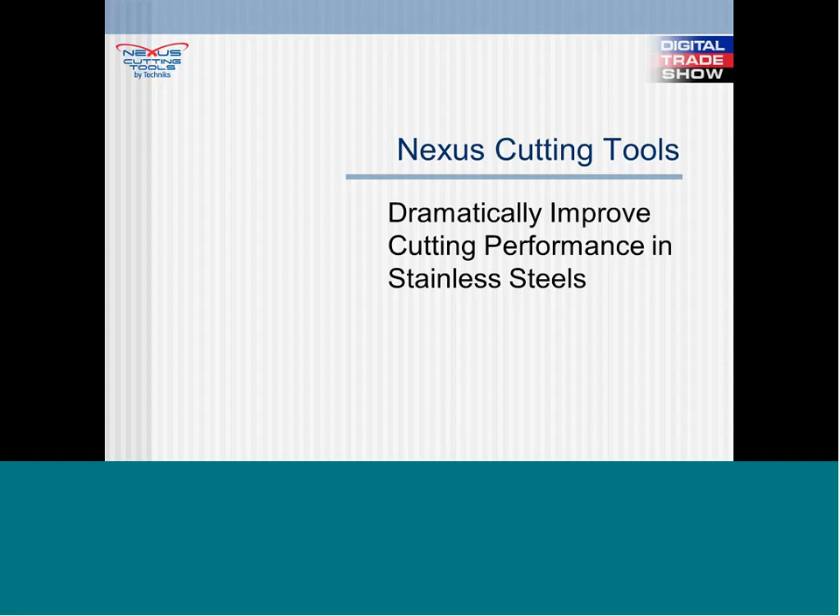This morning, I want to introduce you to Nexus, our insert manufacturing partner, Lamina, and discuss how these products can help you be more profitable and productive in machining stainless steels.

Before we go into any detail, I'd like to give you one small example. Whenever we bring in a new product line, we want to test it in the field and see what sort of results we get. In this case, we called a well-respected job shop customer in Indianapolis who is also a neighbor of ours, and he said, 'Sure, I've got just the part for you guys.' Well, the part was a little challenging. It's stainless steel, there's heavy interruption in the cut, and this particular customer is requiring one entire negative insert per part. In other words, this is what salespeople commonly refer to as the square egg opportunity.

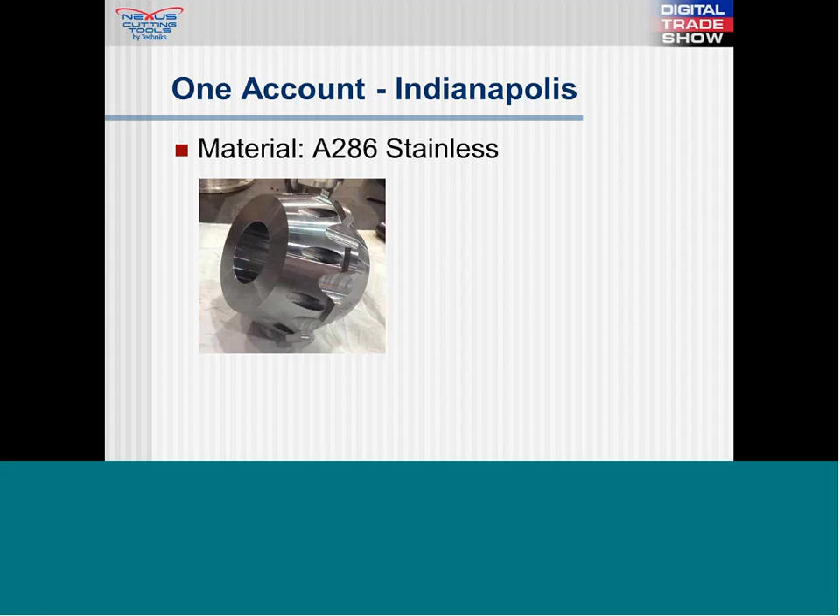So we tested our new Lamina insert from Nexus. In this case, it was a CNMG 432 with the LT1000 coating. And the results—wow. Based on our customer's job of 300 pieces, he went from using 300 inserts to 75 inserts from Nexus and Lamina. This morning, I'd like to spend a little time explaining how this happens and how you can get similar results.

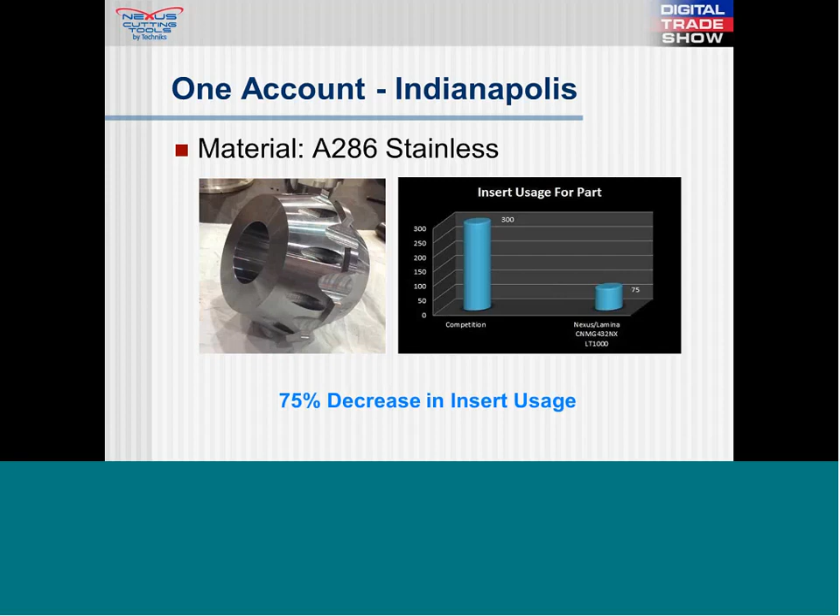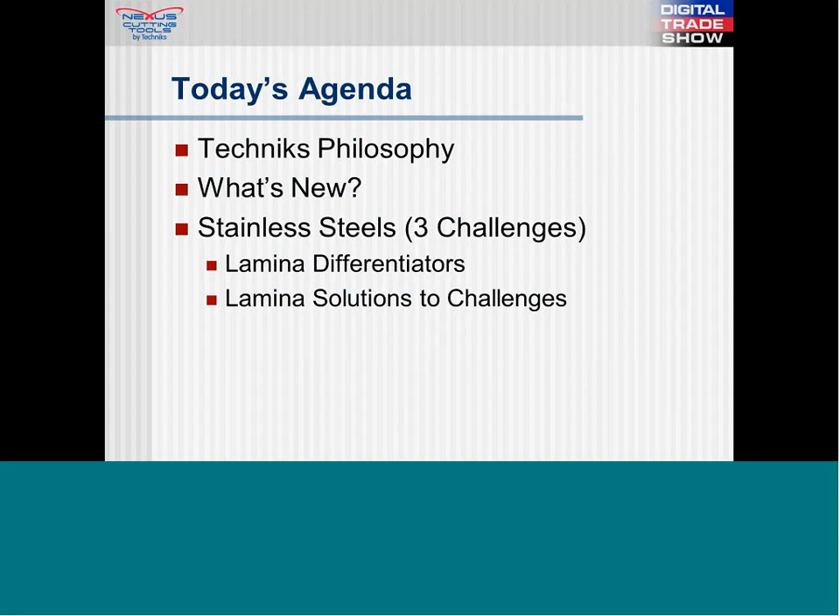The agenda we're going to follow this morning is, first of all, to talk for a moment about Techniks, our company, and our philosophy. I'll be very brief about that, but it is important. Then the eternal question of what's new, the three main challenges of machining stainless steels, and how Lamina addresses them. Finally, and most importantly, how we can work together to test these solutions in your applications.

Even though we can't see each other right now, this time is really about you, the customers, and the only way we can judge our success is by customer results. So a little bit about Techniks.

For over 15 years, we've helped customers with innovative approaches to the CNC world, focusing mostly on the tool holder connection. We've lived by one simple principle: every .0001" of runout costs a customer 10% in tool life. Applying this principle to end mill holders, collet chucks, etc., has set us apart from our competitors and helped earn us a reputation for quality. The way to address run out with a tool holder is by addressing the rigidity and accuracy of the holder. And that's why one of our most successful marketing slogans is and has been, 'Success depends on every component.'

But we're also an innovative company. Tighter bore tolerances in end mill holders, ultra-precision collets, power coat nuts for collet chucks are not exciting things to talk about. They're simple, they're innovative, and they're very effective though. And truthfully, I wish I had a nickel for every time a customer at a trade show has looked at one of our new products and said, 'Why didn't I think of that?' But we're also more than tool holders.

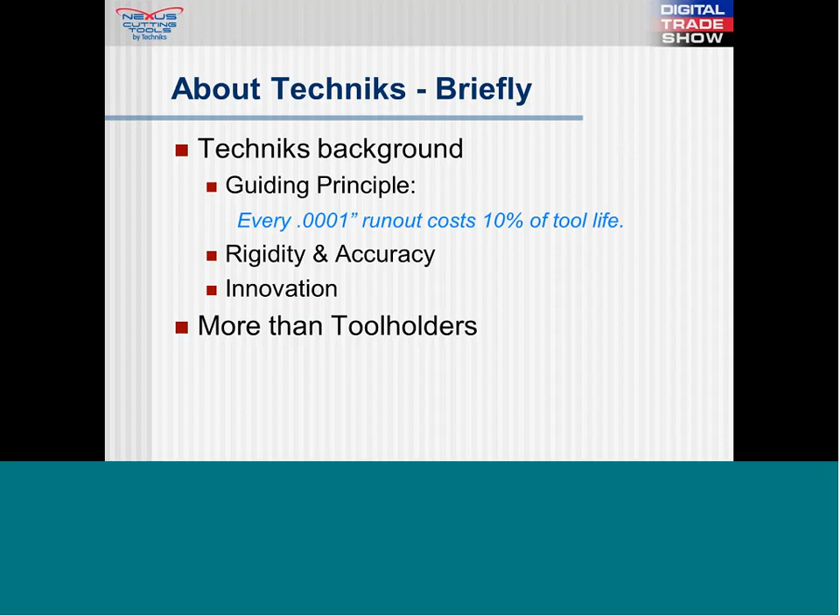Several years ago, we decided to get into the magnetic work holding business because we saw some opportunities to help customers. Over time, that has proven to be a great decision, because instead of helping customers with incremental 1% and 2% improvements in productivity, magnetic work holding has helped them gain 50% time savings. 200% and 300% productivity increases are not uncommon. And always we're looking for new ways to help customers.

Everywhere we go—trade shows, manufacturing plants, open houses—we always get the same question: what's new? Well, today, American manufacturers seem more determined than ever to find new ways to gain competitive advantage. Reshoring American jobs is now as common a conversation as offshoring was just a few years ago. Obviously, this is a very good thing. We're a company that thinks differently, and we think we can bring a helpful and new approach to the way that customers use carbide inserts.

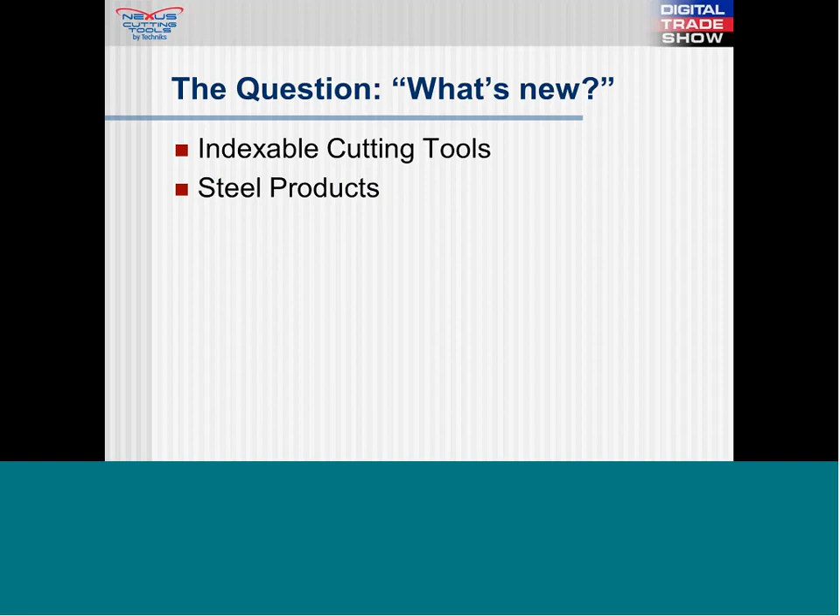Additionally, we're leveraging our expertise in tool holders to create high-performance face mills, indexable end mills, turning tools, boring tools, and indexable drills. In fact, we have several new patents designed to improve rigidity and accuracy in holding tools. The first of these is our shrink mill system. We're the first company to apply heat shrink technology to a face mill. This shrink mill system reduces runout by as much as 30%.

The second new patent is our power lock system. This transforms a standard Techniks collet chuck into a high-performance milling chuck by simply inserting a square shank adapter into the collet chuck. The female adapter engages with the male end of our end mill holders, translating to virtually unlimited holding power, with the accuracy of a Techniks collet chuck at half the price.

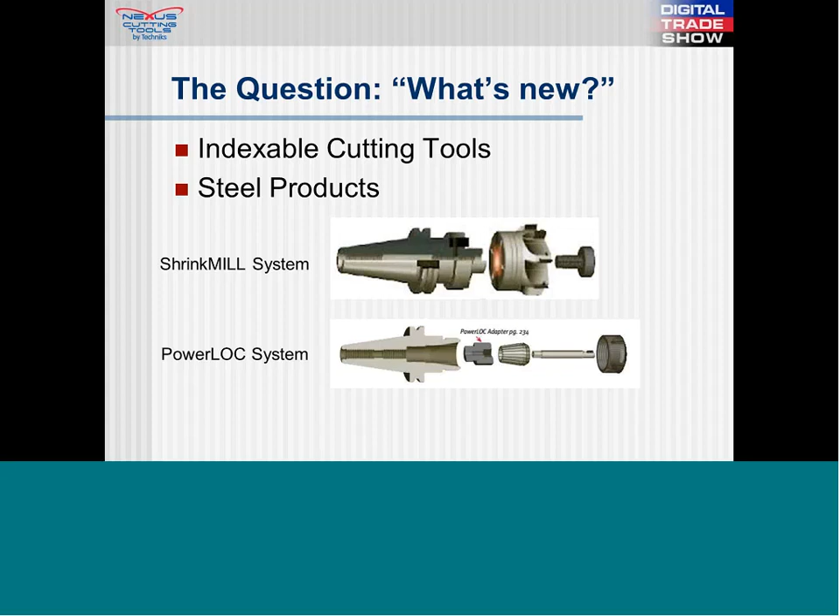So a reasonable question we've gotten from customers is why Techniks and cutting tools? It's important to know a few facts about the way customers use inserts. Some of these facts may be surprising, but my guess is a lot of this will resonate as true for you and your customers.

A few industry facts: half the time, inserts are selected incorrectly. Nearly half the time, inserts are applied incorrectly. And again, nearly half the time, inserts are discarded before they're fully used. It didn't take us long to look at this information and understand there's a tremendous opportunity for someone who can help customers make sense of this and simplify their work.

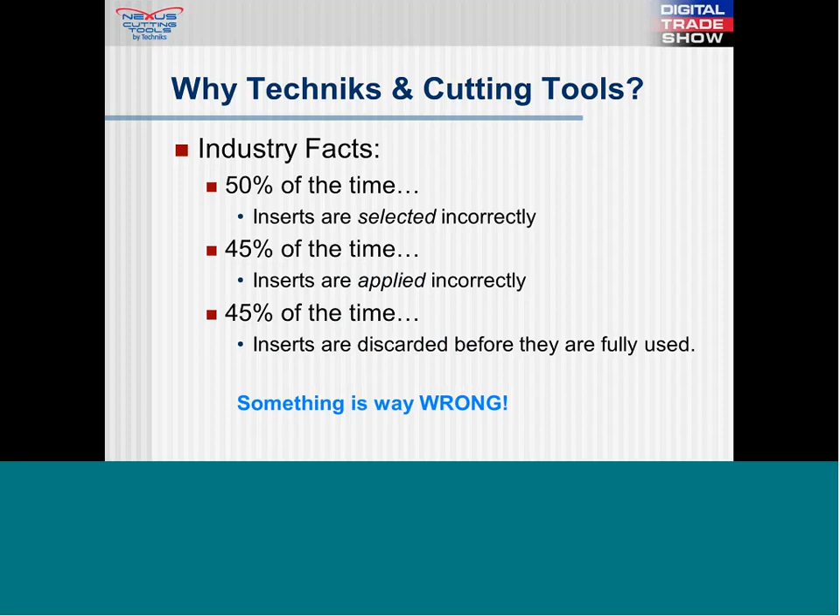So why Lamina? Why did we select them as a partner? We did several years of research, interviewing, and due diligence in our search for a manufacturing partner to make our carbide inserts. The nice way to say it is let's just agree that we kissed a lot of frogs. But eventually we arrived at Lamina Technologies from Switzerland.

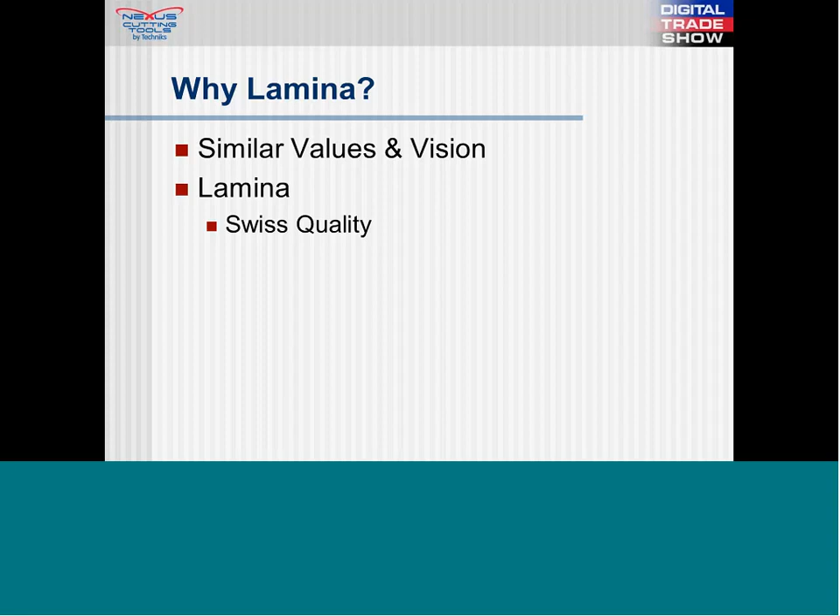First of all, they met our criteria for quality. Swiss quality is a phrase that still carries a lot of credibility, and Lamina lives up to the billing. One small example is that within their insert batches, their tolerances were held to plus or minus 5 microns.

Second, we're extremely compatible in philosophies. They challenge the status quo. They want to offer simplicity, particularly to the small and mid-sized shops who don't get the attention of the large carbide manufacturers, instead of the typical new grade offerings that customers are conditioned to expect a couple times a year from the major carbide manufacturers. Most importantly, they use common sense in developing products and serving their customers. Like us, this means simplicity, predictability, and responsiveness.

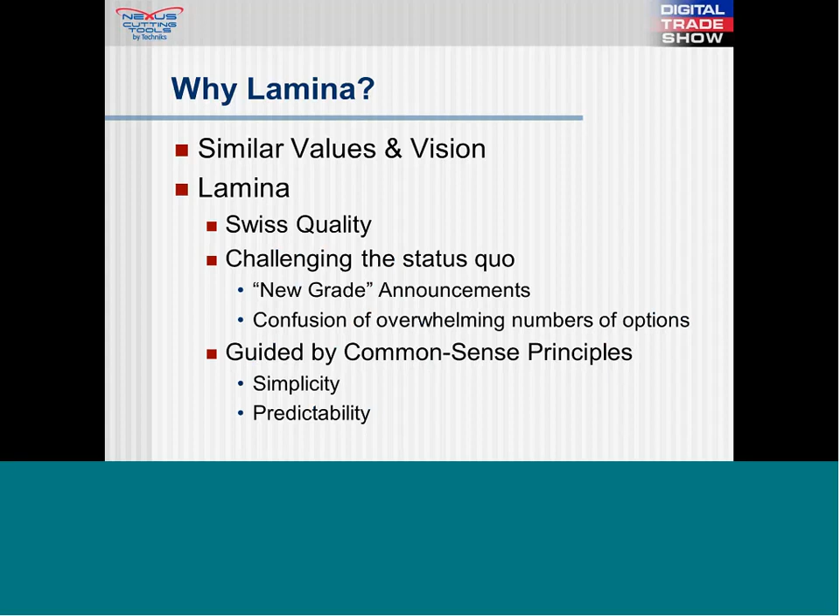So how does this help with stainless steels? That's what we're here to talk about today. I'd like to review 5 ways in which Nexus and Lamina work together to address the challenges of stainless steels.

As we've discussed, the importance of using the right tool holder for the job goes a long way to start with. However, on the Lamina side, they start with a sub-micron carbide powder with no cobalt enrichment. This helps resist the compressive forces typical of cobalt-enriched inserts, and we'll get to this later and how this affects application.

The third point is proprietary edge preparation. Lamina's unique edge preparation is a complete departure from the traditional brush honing technique. Instead, Lamina uses a micro sandblasting technique that allows tolerances of plus or minus 5 microns. This precise honing allows for extremely sharp geometries, even with Lamina's substantially thicker PVD coatings.

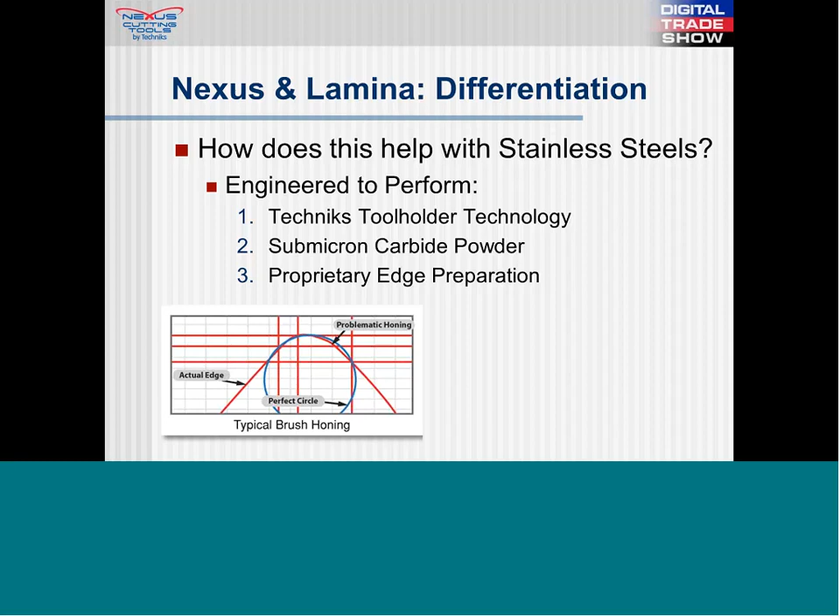Note in these graphics, the competitor shown now, the blue circle represents a perfect circle, and the red arc represents the actual edge of the insert. The closer the actual edge follows the perfect circle, the more precise and consistent the edge geometry. On the right is Lamina's edge preparation, and as you can see, the differences are dramatic, and this will translate to dramatic performance also in machining.

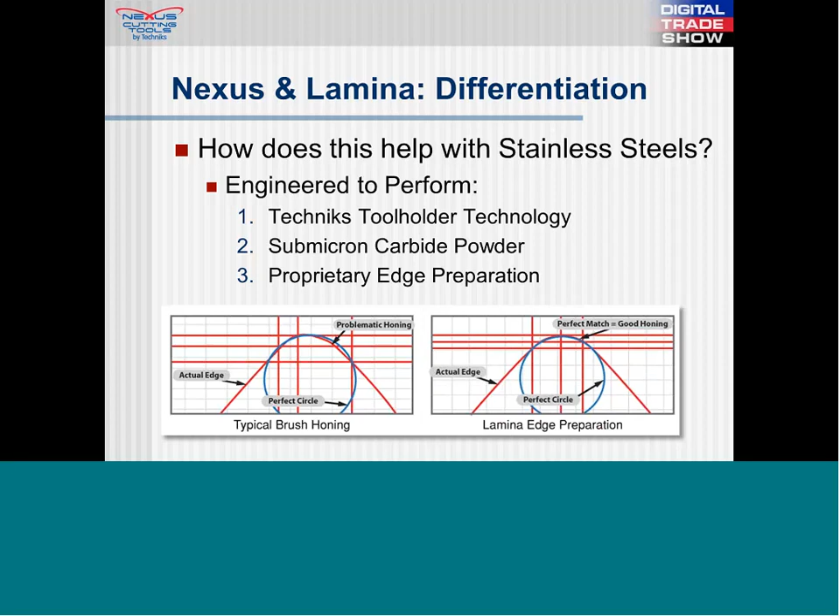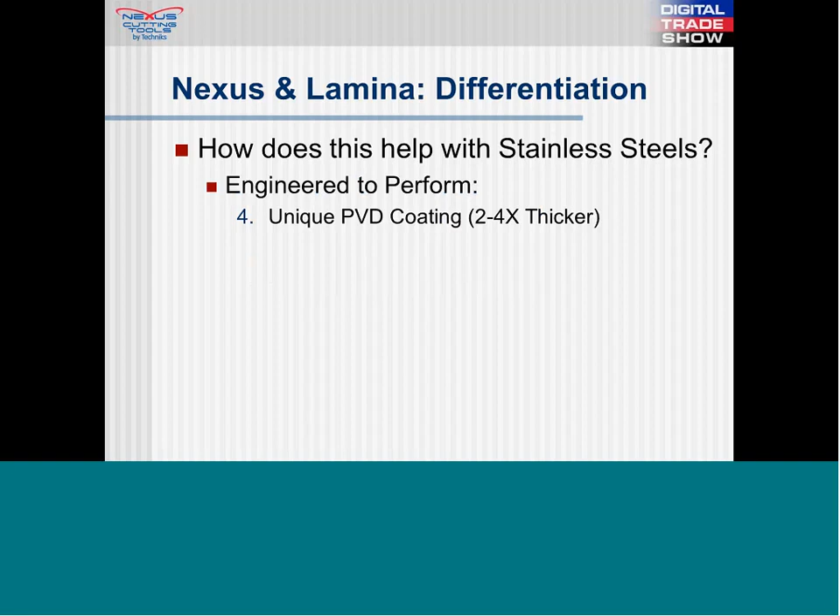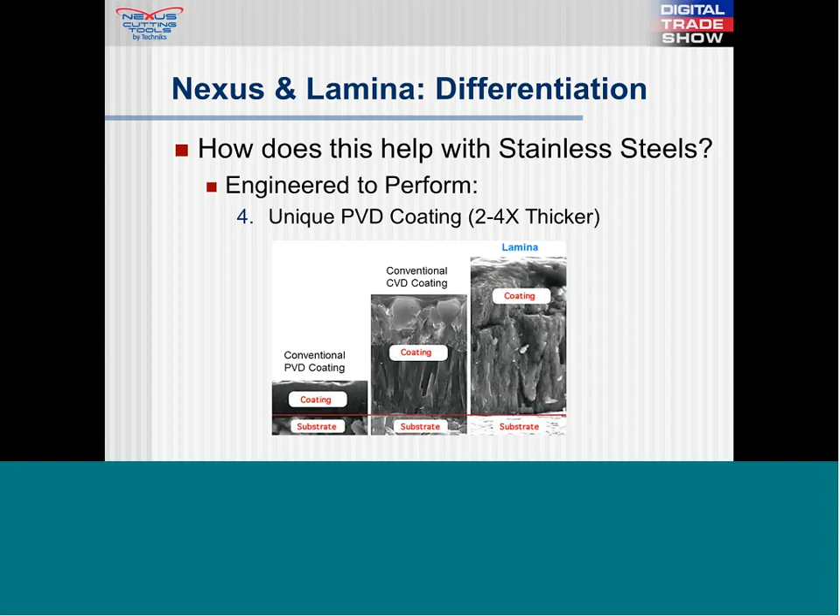The fourth item we're going to discuss is Lamina's unique PVD coating. Lamina's proprietary PVD coating provides both heat resistance and toughness. Lamina's scientists have developed a proprietary PVD coating technology, the newest version called Magia. This is 2 to 4 times thicker than their nearest competitor. These coatings dramatically increase the insert's overall life and performance, accompanied by sharper geometries from the precise honing technique. Customers experience far less downtime and gain productivity that many thought unachievable.

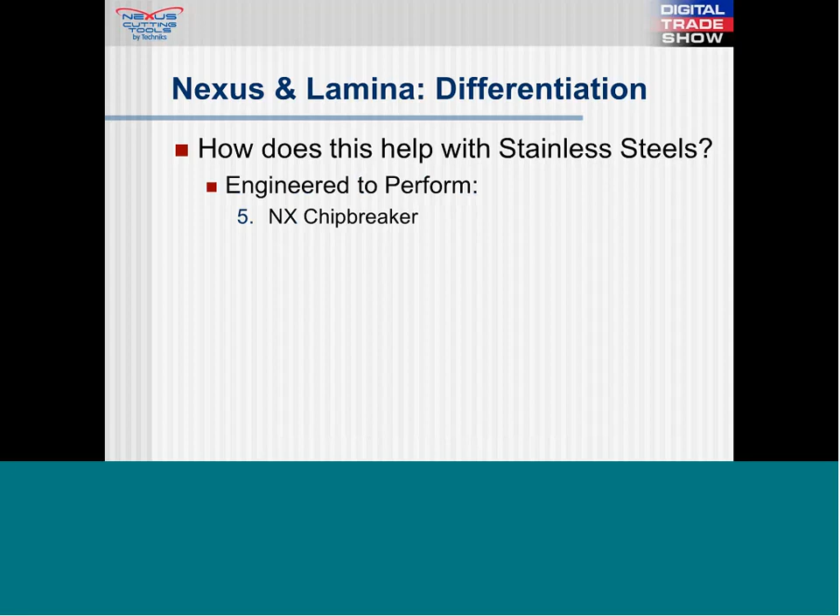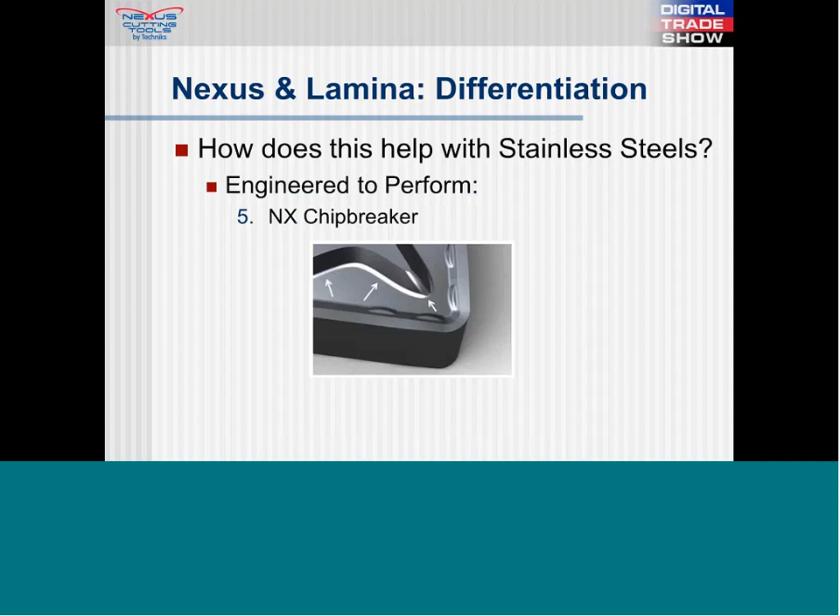The last item engineered into the product to help with stainless steels is Lamina's NX chip breaker. This is perfect for the ductile and gummy nature of stainless steels. This innovation provides a fully positive rake angle, precisely positioned deflectors, and a post-coating surface treatment to reduce friction and enhance chip evacuation in abrasive materials like stainless steel.

So let's talk a little about stainless steel categories. As this audience understands, there are 3 basic categories of stainless steel. The first is martensitic and ferritic, for example 400 series and 17-4 PH. A brief comment on this category: these materials are the least challenging of the groups. They have very similar machining characteristics to alloyed steels. Lamina solutions offer customers the advantage of working in these materials, but that's not where our focus is going to be today.

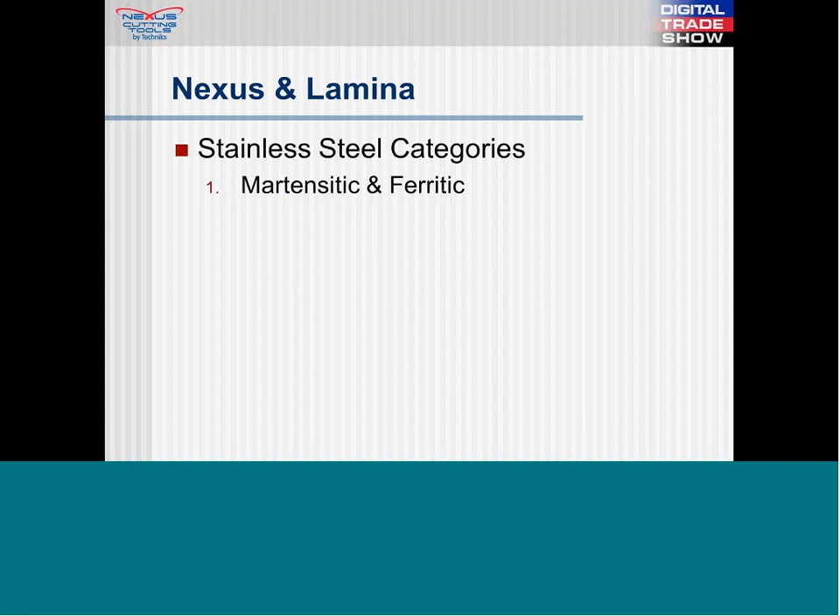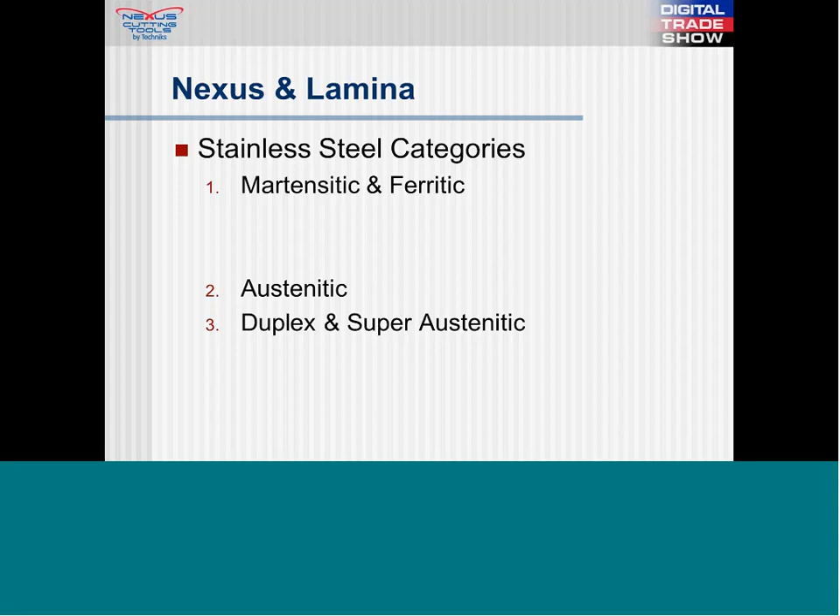We're going to focus on the second 2 categories, which are austenitic, and then duplex and super austenitic. Austenitic would be, for example, 300 series stainless steel. These last 2 groups are the most difficult to machine, and it's where we want to spend our time today. They behave very similarly to high-temp alloys because of their heat resistance and cutting forces. Let's take a look at the challenges. There are really 3 challenges, and how Lamina addresses them to help you and your customers.

Number one: stainless steels have a tendency to work harden during machining. This is again due to their gummy or sticky nature, the words that typically come up.

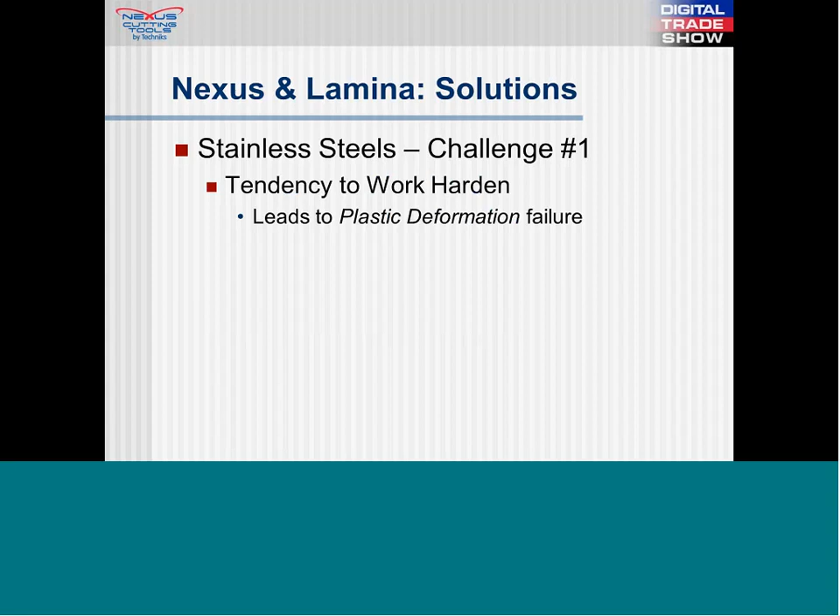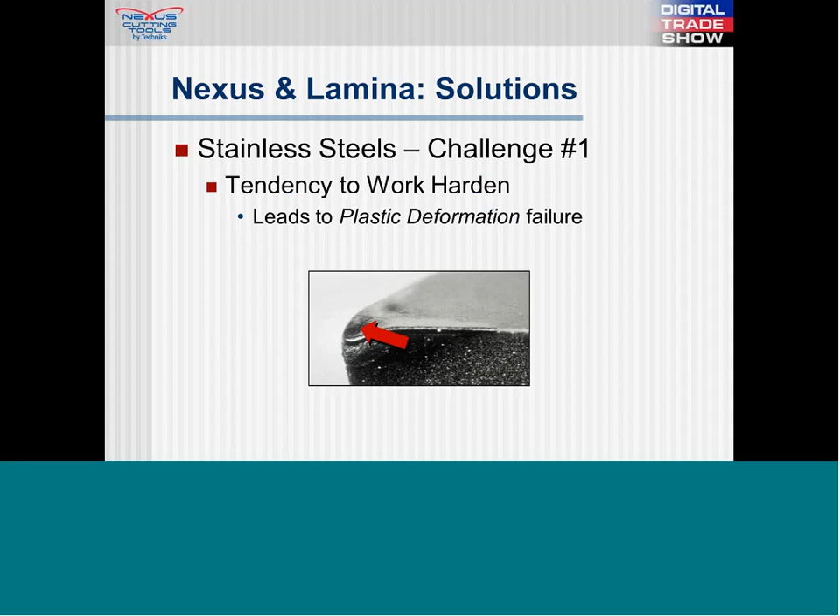Work hardening keeps the heat in the workpiece and in the cutting tool instead of being evacuated with the chips. Typical inserts will fail due to plastic deformation in these circumstances, and I've shown a photograph of it here that may look familiar to you if you've had to work in stainless with most inserts.

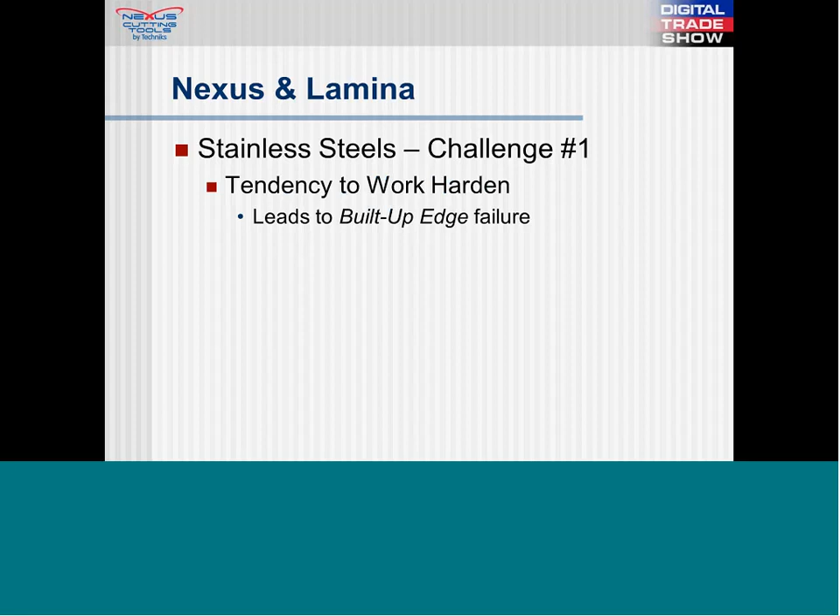Now we're still talking about work hardening. What some customers will do is simply slow down on their feeds and speeds to help address the problem. However, that creates a different problem known as built-up edge failure. In other words, whether you slow down or you don't, you usually have two choices with stainless steels that lead to premature failure modes, and neither of these choices is a good option.

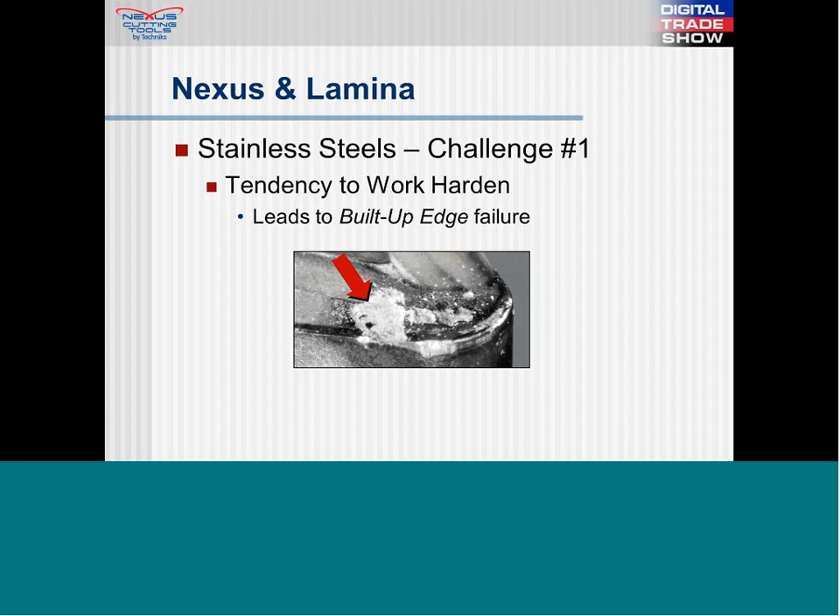So how does Lamina address work hardening? Well, first, the NX chip breaker, which we talked about a moment ago. It's fully positive rake angle - sorry to be repetitive, but this is very important - and the honing technology easily cuts the gummy material. That's what it was made to do.

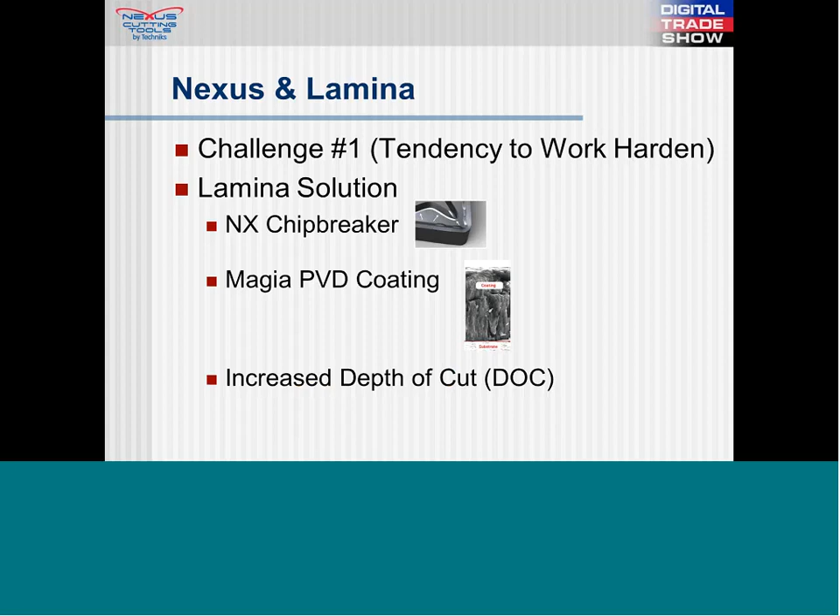The second thing is that coating. The PVD coating greatly reduces friction. Combined with the NX chip breaker, these two features produce far less heat and far better chips, extending your tool life. Now, incidentally, Lamina inserts like to take heavy depths of cut. An additional benefit is that your productivity is going to increase even further thanks to that.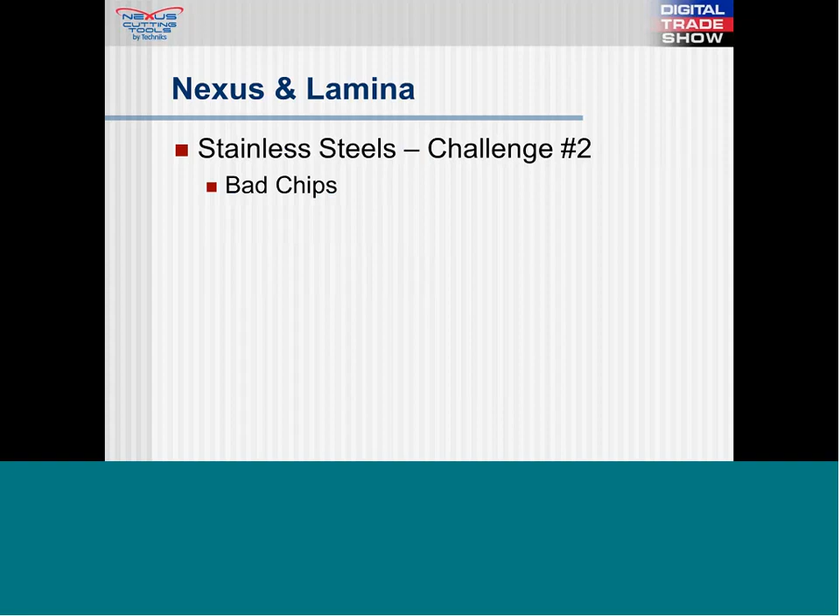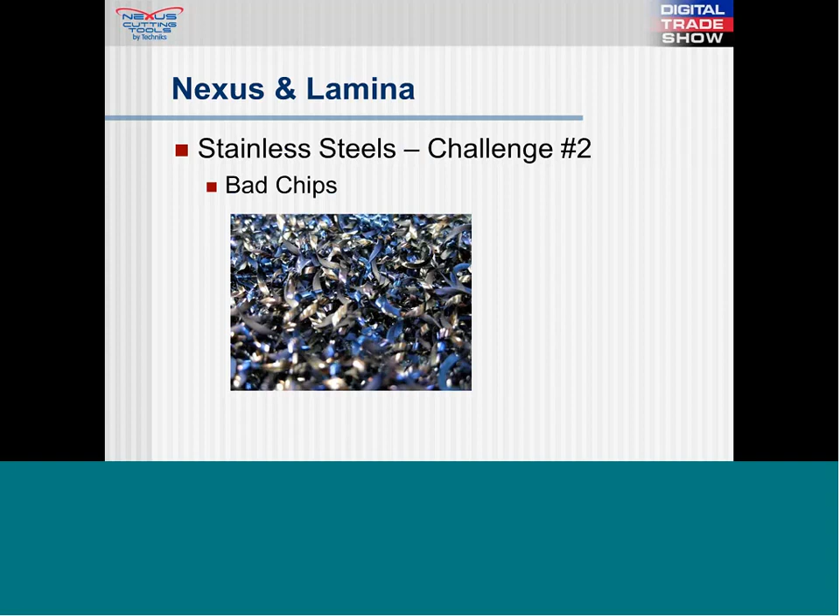Challenge 2, bad chips. This is due to the ductile, gummy, sticky nature of stainless steels. In most inserts, stainless steels produce undesirable, long, and stringy chips. This is what keeps heat in the workpiece and the cutting tool. This leads to the insert failure mode of plastic deformation that we discussed earlier. Jobs cannot be left unattended because the operator has to manually remove chips after each part.

How does Lamina address the problem with chips? Well, what we all want are chips that look like 6s and 9s. Lamina has two tools to help address this. The first is the edge preparation we discussed. The heat is reduced, better evacuated with the proper chip formation, and the operator is free from monitoring the machine and clearing chips constantly.

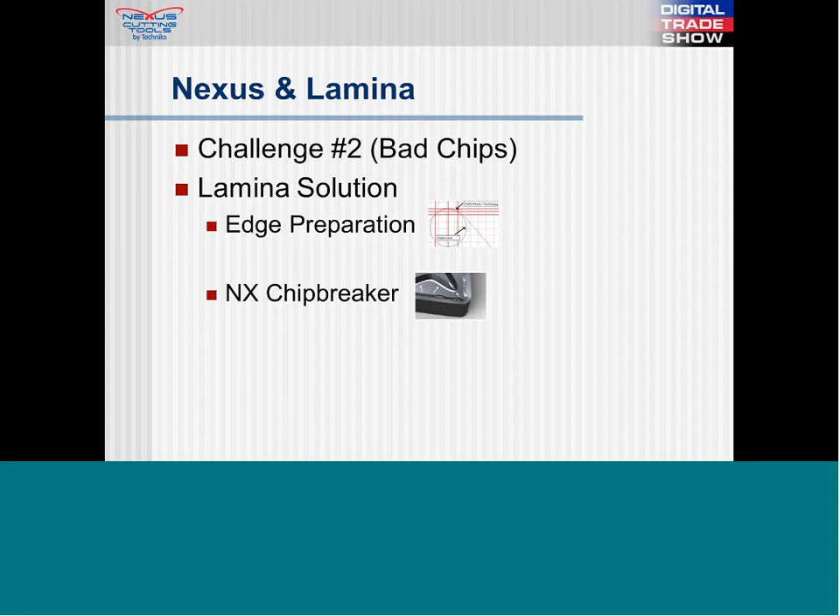The second, again, we're going to bring up that NX chip breaker, that positive rake angle, the deflectors, surface treatment, reduced friction, the ability to break the chips, and greatly enhanced chip evacuation. The result are the chips that we want.

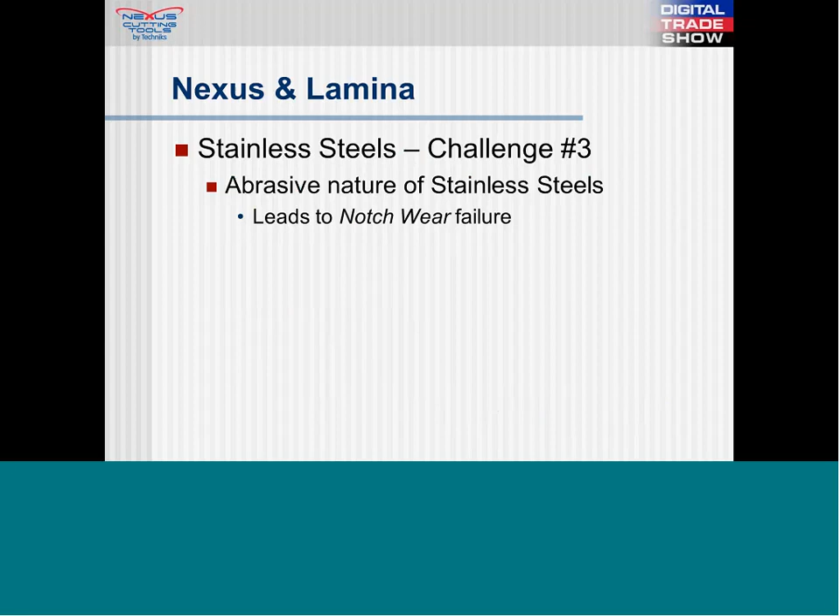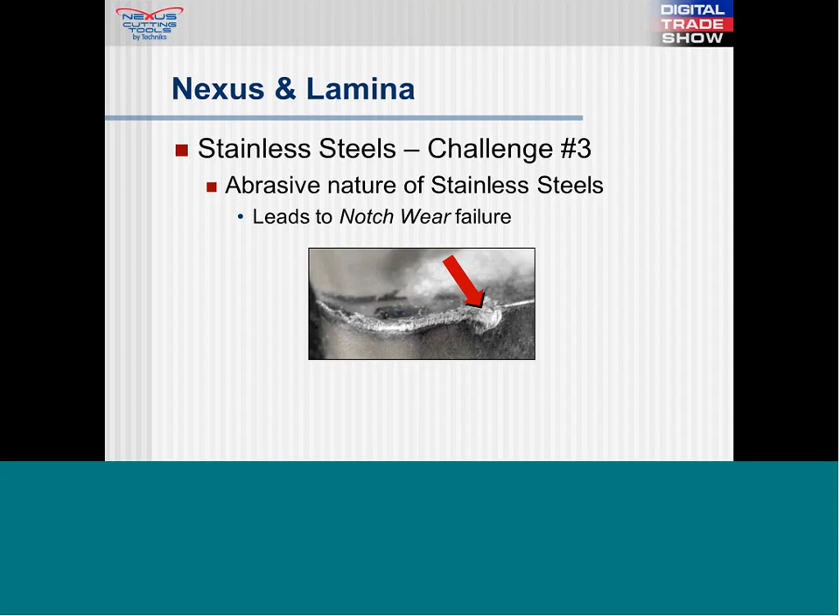Challenge number 3, the abrasive nature of stainless steels frequently leads to another failure mode known as notch wear. This problem causes a lot of downtime to change inserts. Most importantly, though, if it's not detected in time, notch wear can lead to catastrophic failure of the insert, total loss of the corner.

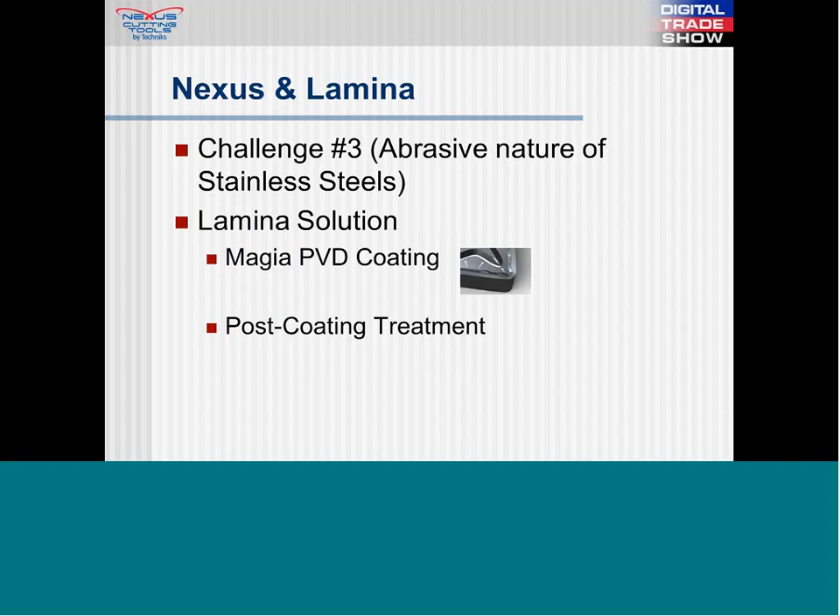Lamina combats this, again, with the PVD coating and the NX chip breaker. In addition to that, the post-coating treatment that Lamina uses after the coating is proprietary, and they invest even more time here to deliver a product to reduce the friction and wear.

So let's do a quick review of what we've talked about this morning. Lamina is engineered to perform in stainless steels. It is designed in every step of the engineering process, the production process, to be prepared when it comes into your shop to address this type of material.

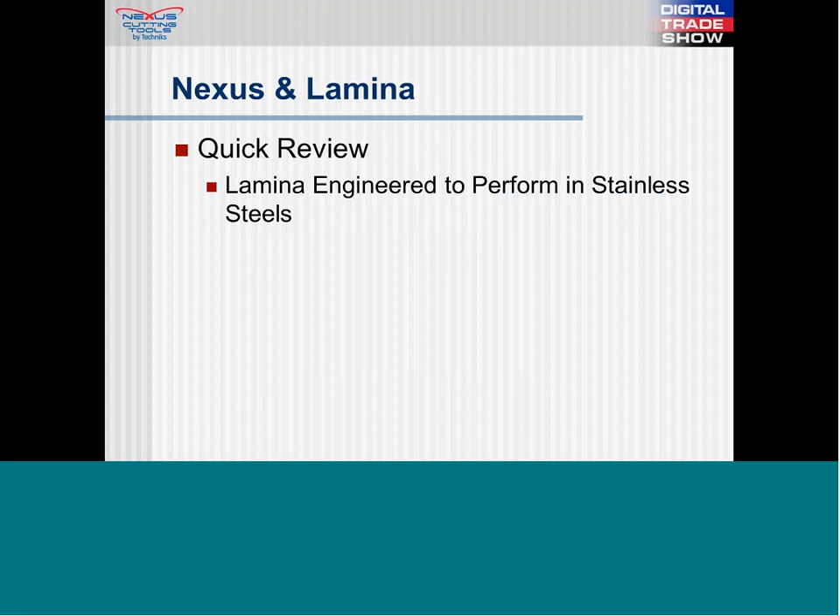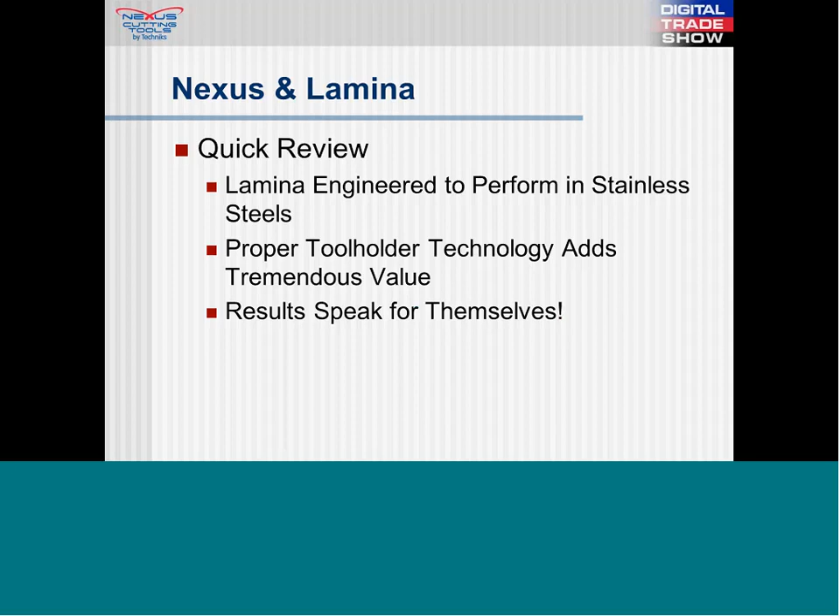We've also talked about the proper tool holder technology adding tremendous value to your operation by having the best rigidity and accuracy possible. We talked about our customer and the results that he had, and obviously we have many more customers than just this one, but just to be very simple, I wanted to share that result again. This gentleman went from 300 inserts to 75 inserts, and also share the cost, where his cost went down just as dramatically as his use of inserts.

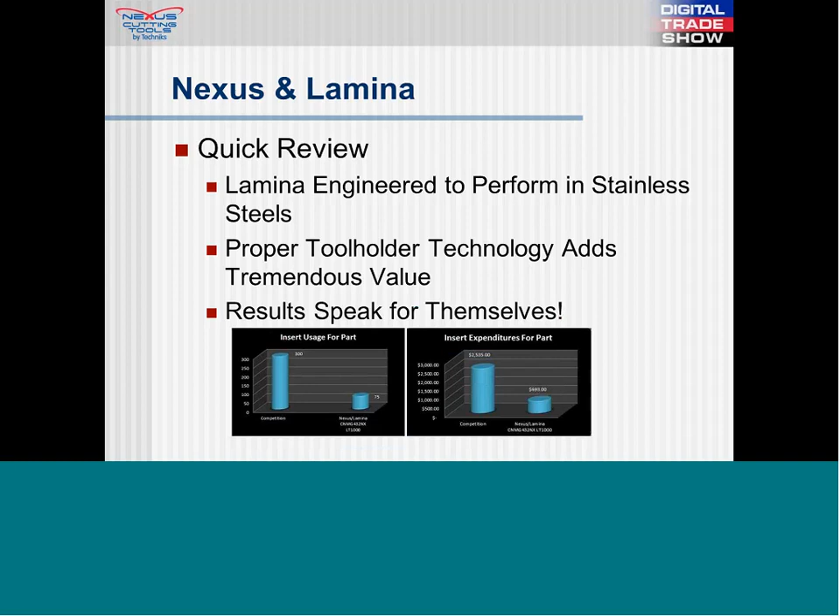Now, when you remember that this is one job of 300 pieces in one shop of many, many jobs and many, many different materials, but a lot of them containing these same challenges, this can be a dramatic improvement in this gentleman's business. And that's what we wanted to talk about with you, so obviously thank you for your time.